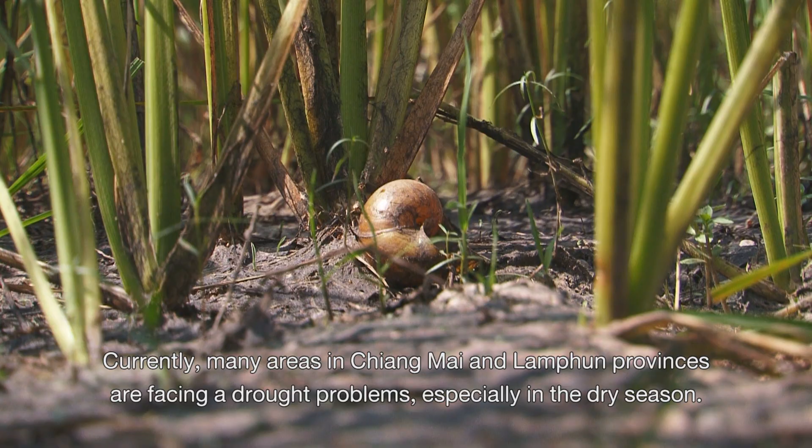Currently, many areas in Chiang Mai and Lamphun provinces are facing drought problems, especially in the dry season. The problem is due to urban development and increasing population, which leads to higher demand for water use.

The Royal Irrigation Department (RID) has concretely developed water resources projects in the Ping River Basin for decades. So far, there have been 3 successful irrigation projects in the Ping River. They are Mae Taeng Weir, Mae Ngat Sombunchon Reservoir, and Mae Kuang Udom Thara Reservoir projects, all of which supply water to irrigated areas of more than 500,000 rai, or 80,000 hectares, in Chiang Mai and Lamphun provinces.

While the average annual runoff of the Mae Taeng River is 622 million cubic meters, that of Mae Ngat Sombunchon Dam is 332 million cubic meters. Despite the great capacity of Mae Kuang Udom Thara Reservoir, water stored in the dam is so little that it is not sufficient for the consumption demand. Even in the rainy season, water has never reached the maximum capacity of the reservoir.

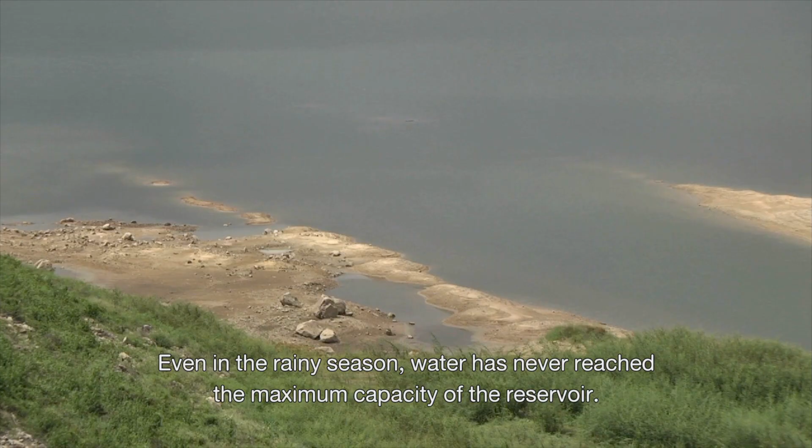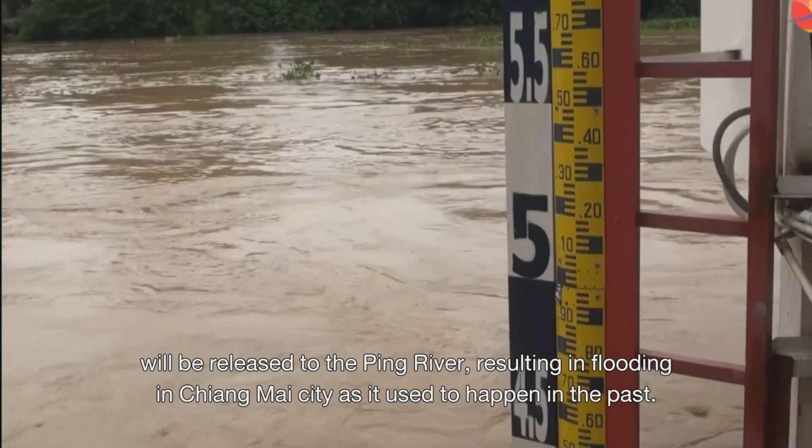So far, the water volume in the Mae Taeng River is sufficient to be irrigated to the right main irrigation canal of the Mae Taeng operation and maintenance project for the entire year. During the rainy season, July to November, a large quantity of water in the Mae Taeng River will be released to the Ping River, resulting in flooding in Chiang Mai City, as it used to happen in the past.

Each year, Mae Ngat Sombunchon Reservoir supplies sufficient water to the irrigation area, thanks to its wide catchment area, which can store more water than Mae Kuang Udom Thara Reservoir.

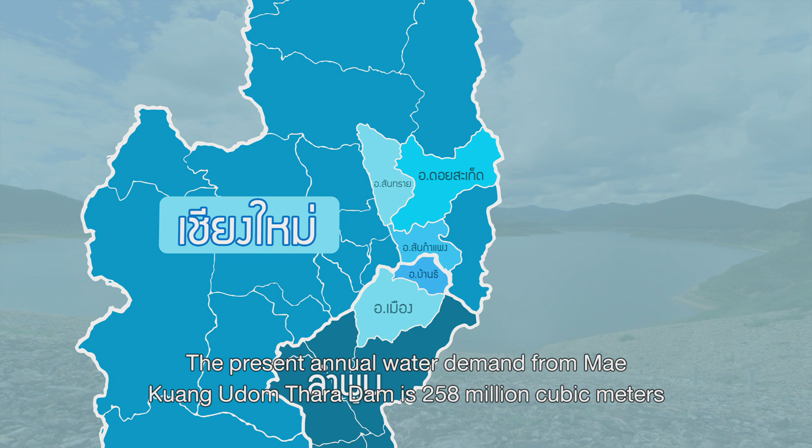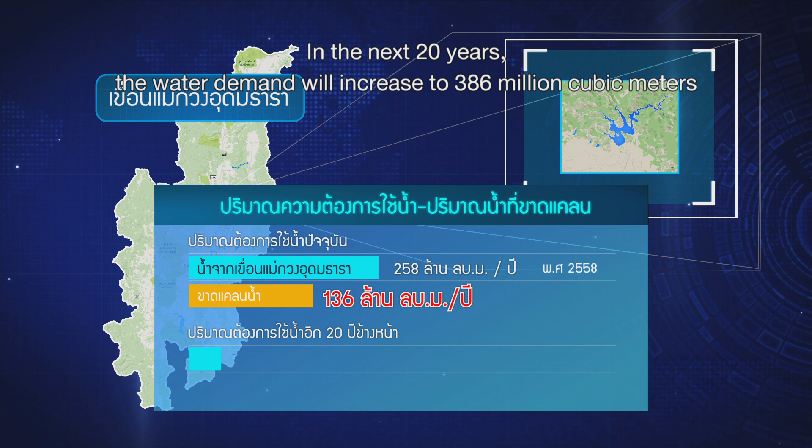According to the water demand statistics of Doi Saket, San Sai, and San Kamphaeng districts, Chiang Mai province, and Ban Thi and Mueang districts, Lamphun province, the present annual water demand from Mae Kuang Udom Thara Dam is 258 million cubic meters, while the water shortage is 136 million cubic meters. In the next 20 years, the water demand will increase to 386 million cubic meters annually, and the water shortage will be 173 million cubic meters.

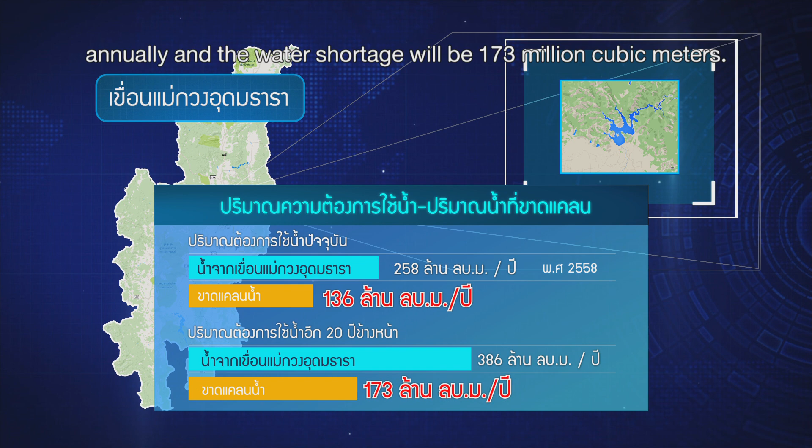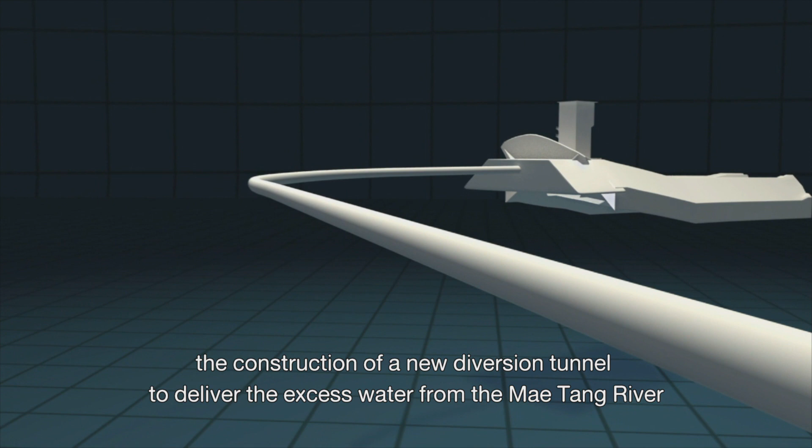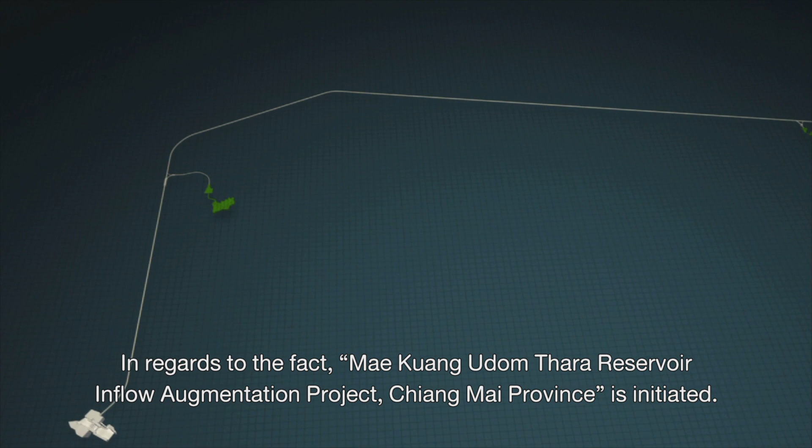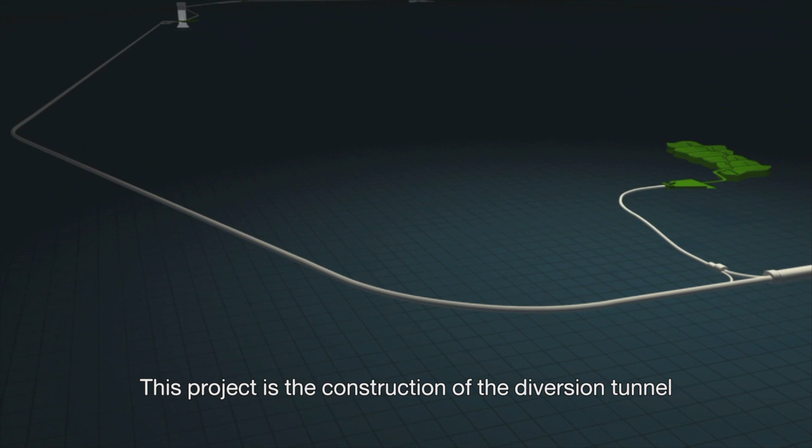Based on the cost-benefit analysis and environmental impact assessment, the construction of a new diversion tunnel to deliver the excess water from the Mae Taeng River to the Mae Kuang Udom Thara Reservoir is the best solution. In regard to this, the Mae Kuang Udom Thara Reservoir inflow augmentation project, Chiang Mai province, is initiated. This project is the construction of the diversion tunnel, with a total distance of approximately 49 kilometers.

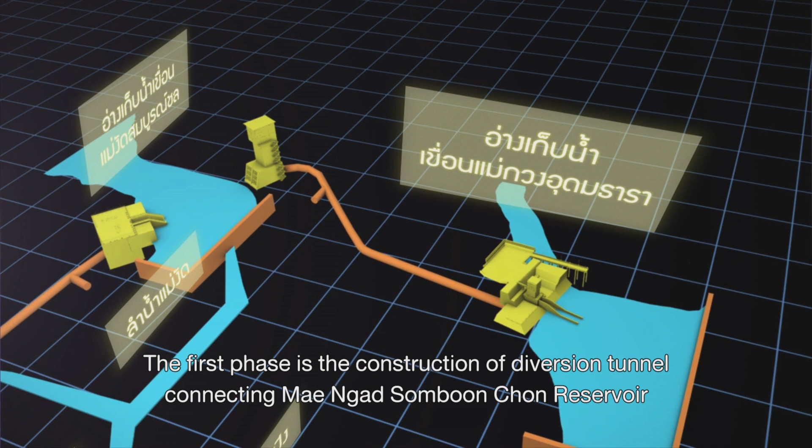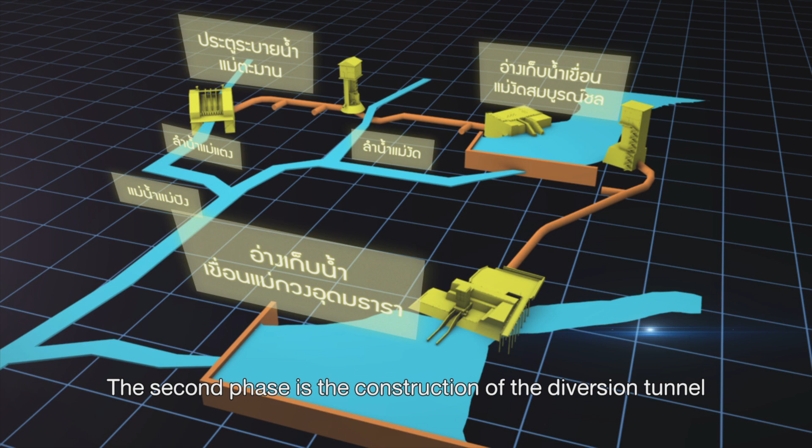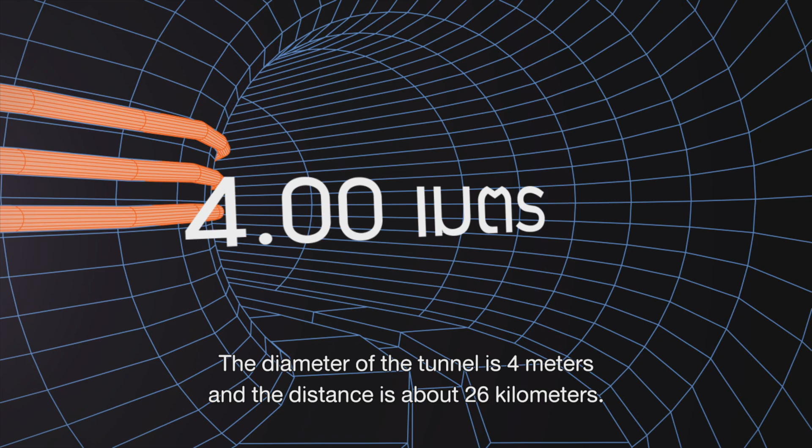The project is divided into 2 phases. The first phase is the construction of the diversion tunnel connecting Mae Ngat Sombunchon Reservoir and Mae Kuang Udom Thara Reservoir. The diameter of the tunnel is 4.2 meters, and the distance is about 23 kilometers. The second phase is the construction of the diversion tunnel connecting the Mae Taeng River and Mae Ngat Sombunchon Reservoir. The diameter of the tunnel is 4 meters, and the distance is about 26 kilometers. The 2 phases comprise disposal areas for excavated materials from the tunnel and appurtenant structures.

The Office of Construction Project for Large-Scale Irrigation 1, the Bureau of Large-Scale Water Resources Development, RID, the Ministry of Agriculture and Cooperatives are responsible for providing the constructors to carry out the construction of the Mae Taeng–Mae Ngat Diversion Tunnel, which is divided into two construction contracts according to procurement. In this section of the contract, Siam Pan Wattana Public Company Limited is responsible for completing the construction within 1,800 days with a budget of 2,134 million baht.

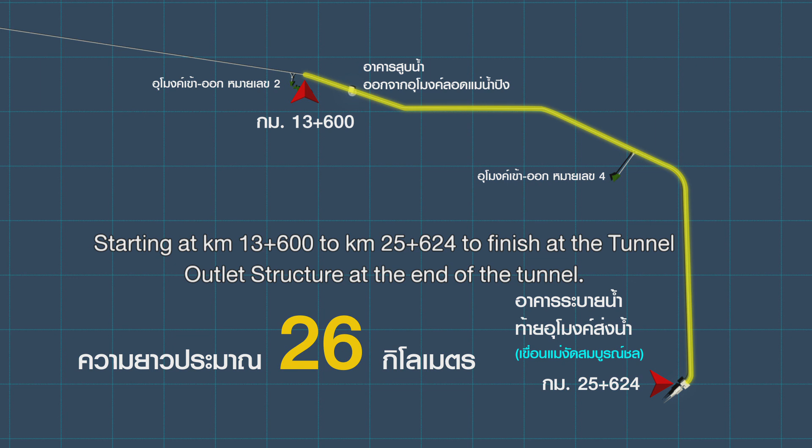The Mae Taeng–Mae Ngat Diversion Tunnel has a total length of about 26 kilometers in the responsibility of the contract, starting at kilometer 13+600 to kilometer 25+624, to finish at the tunnel outlet structure at the end of the tunnel, located at the edge of the Mae Ngat Sombunchon Reservoir, which will proceed with all 10 construction activities.

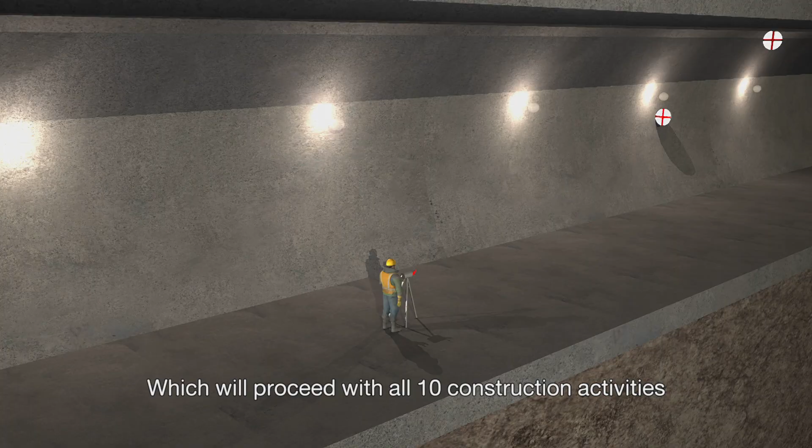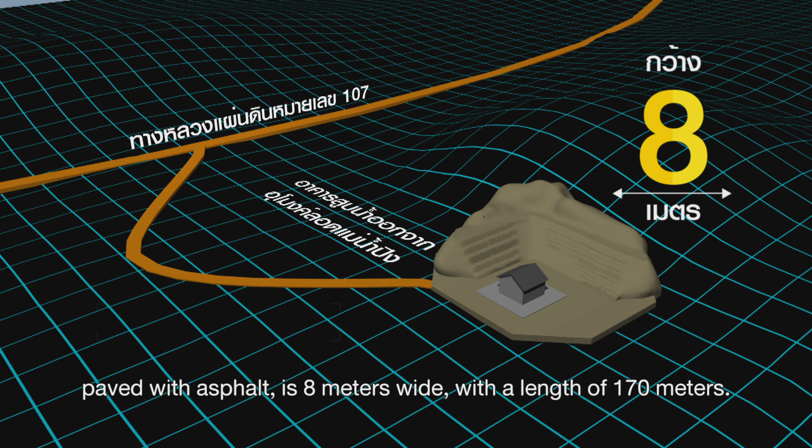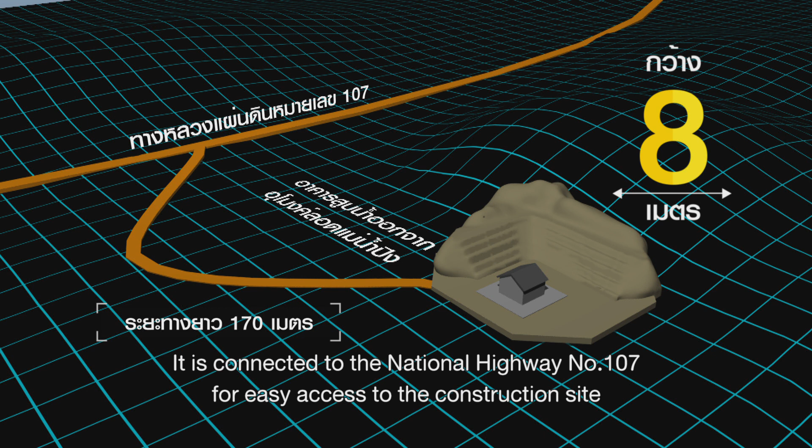Activity 1. Construction of access roads. In this part, 4 roads are constructed. 1. Road maintenance work for the pumping structure of the Ping River Siphon Tunnel, paved with asphalt. It's 8 meters wide with a length of 170 meters. It is connected to National Highway number 107 for easy access to the construction site for pumping water out of the Ping River Tunnel.

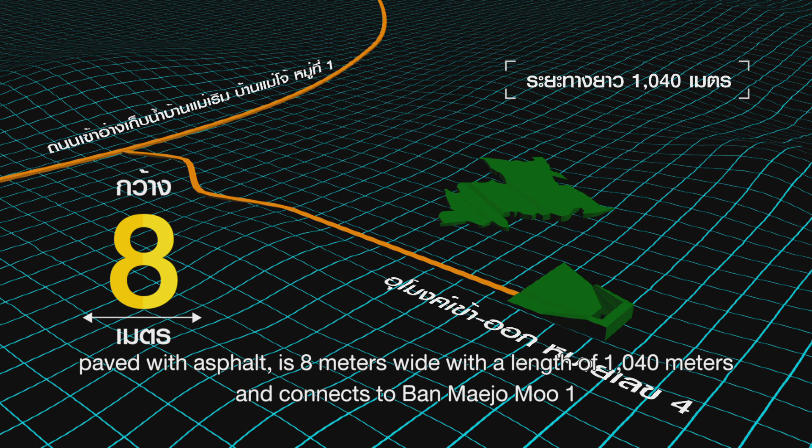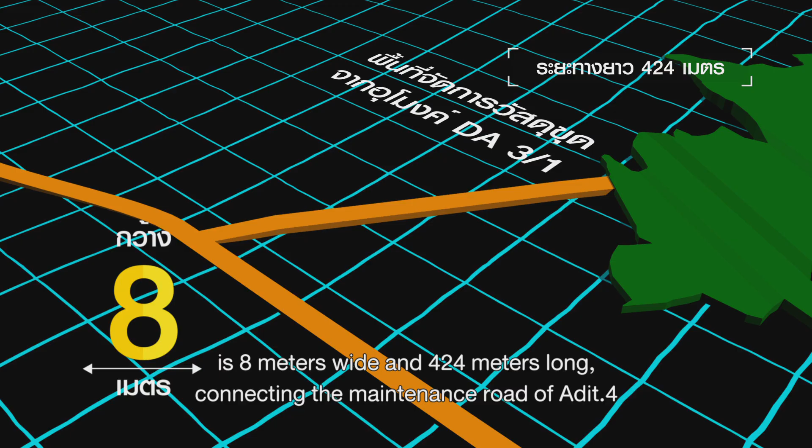2. The maintenance road of adit number 4, paved with asphalt. It's 8 meters wide with a length of 1,040 meters and connects to Ban Maejo Moo 1. 3. The maintenance road of disposal area number DA3/1. It's 8 meters wide and 424 meters long. Connecting to the maintenance road of adit 4, it is used to convey disposal materials from the tunnel to the DA3/1 site.

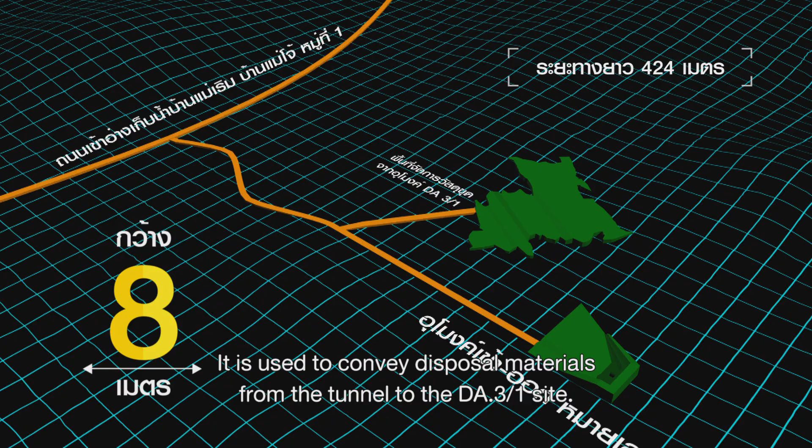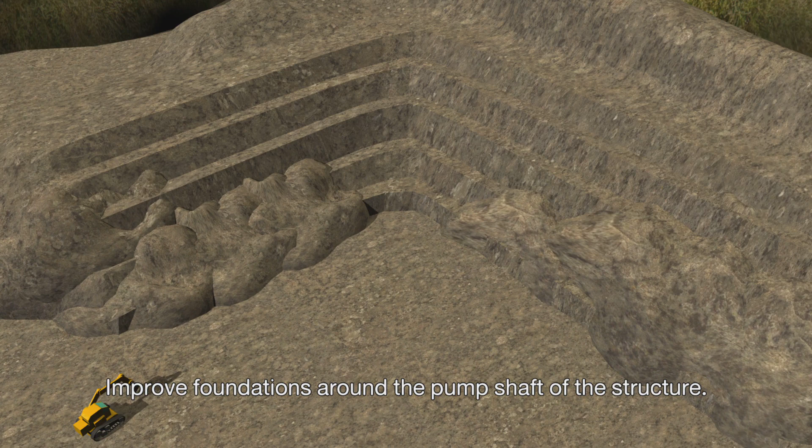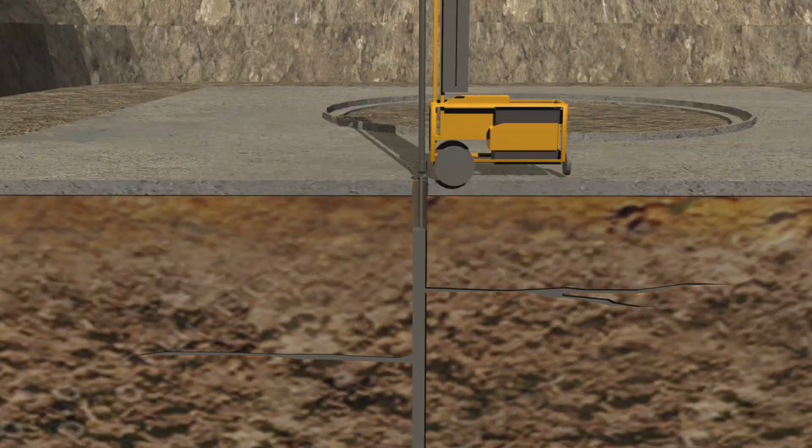Activity 2. Construction of the pumping structure of the Ping River Siphon Tunnel. Start to clear the construction area. Slope protection construction. Improve foundations around the pump shaft of the structures. Drill the shaft of the pumping structure using the vertical drill and blast method.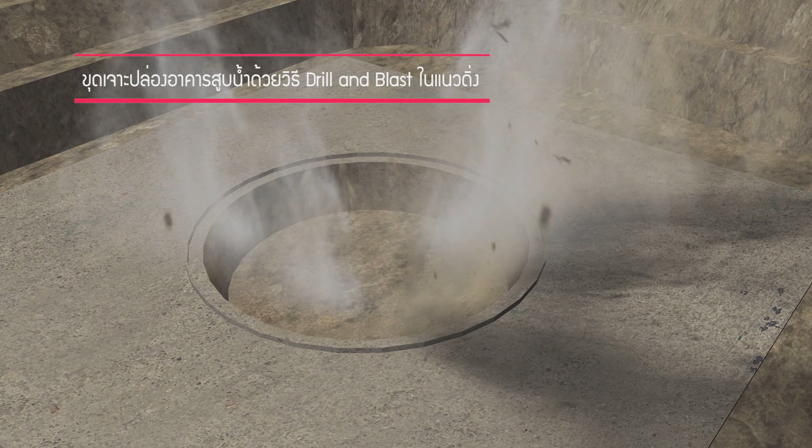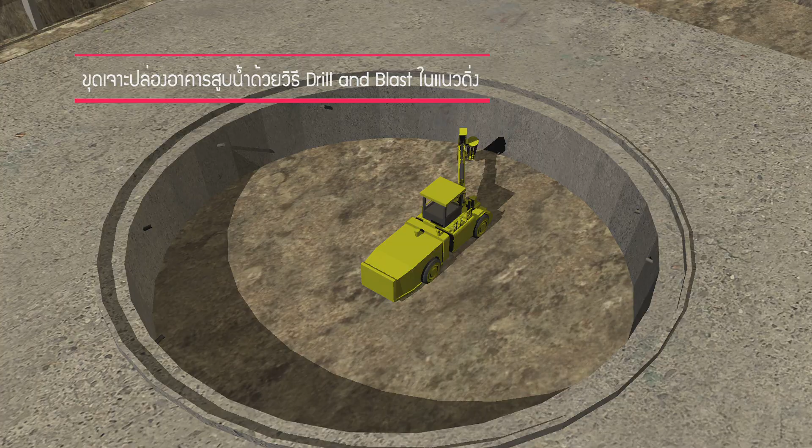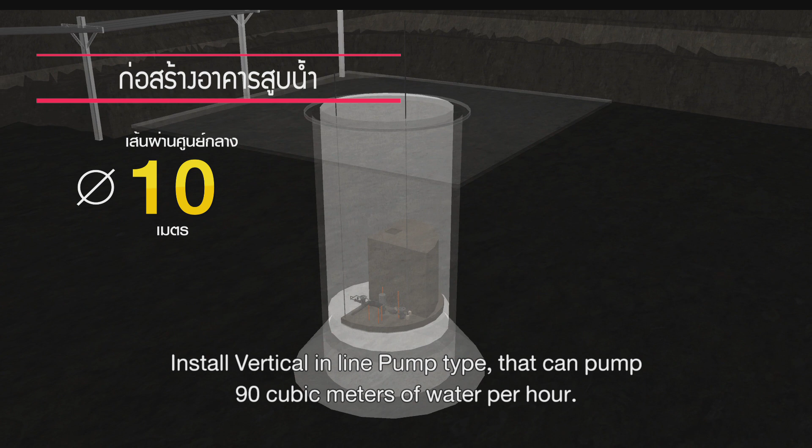And constructing a pumping structure with securely reinforced concrete with a diameter of 10 meters. Install a vertical inline pump type that can pump 90 cubic meters of water per hour. The pumping structure of the Ping River Siphon Tunnel is used for pumping the water from the Ping River Tunnel to go down to perform the maintenance of the Ping River Tunnel.

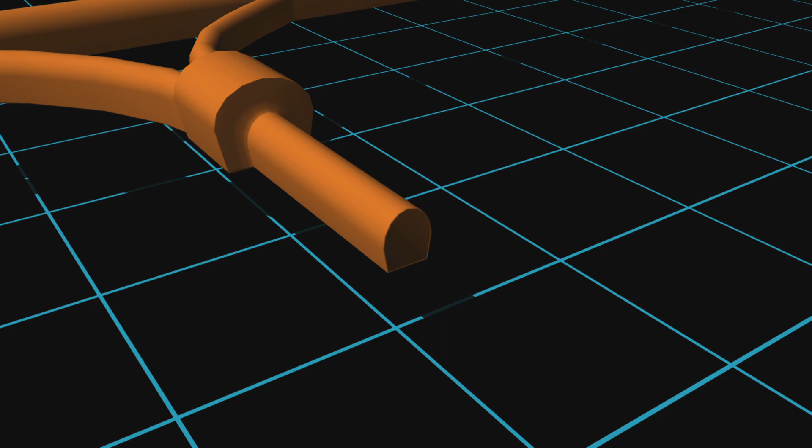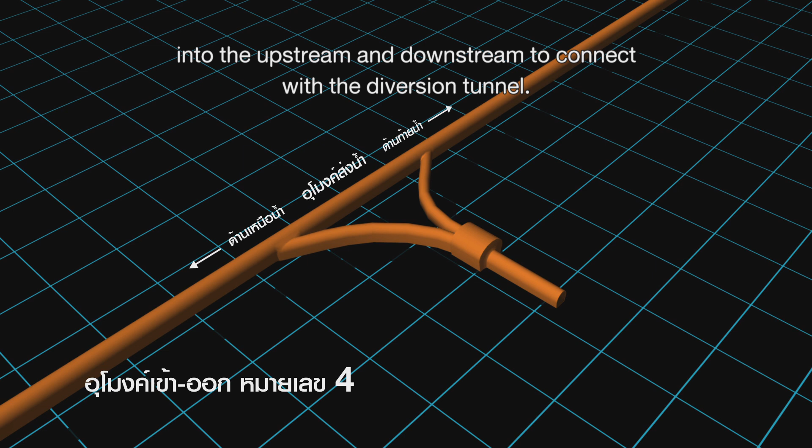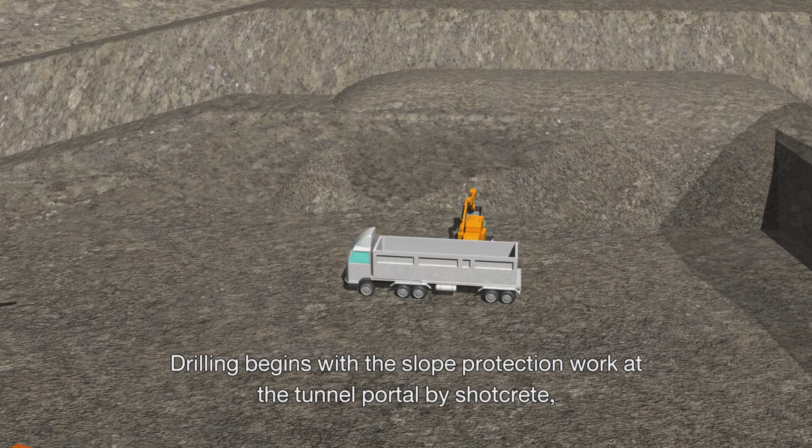Activity 3. Construction of adit number 4, AD4. Adit AD4 is 577.763 meters long with a diameter of 6 meters. The end of the tunnel is separated into upstream and downstream to connect with the diversion tunnel. Drilling begins with the slope protection work at the tunnel portal by shotcrete, installing soil bolts and rock bolts, and strengthening the tunnel portal with forepoling work and a steel arch.

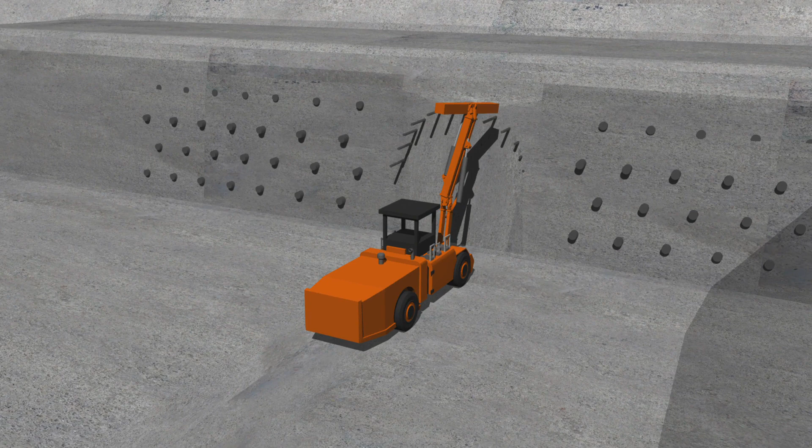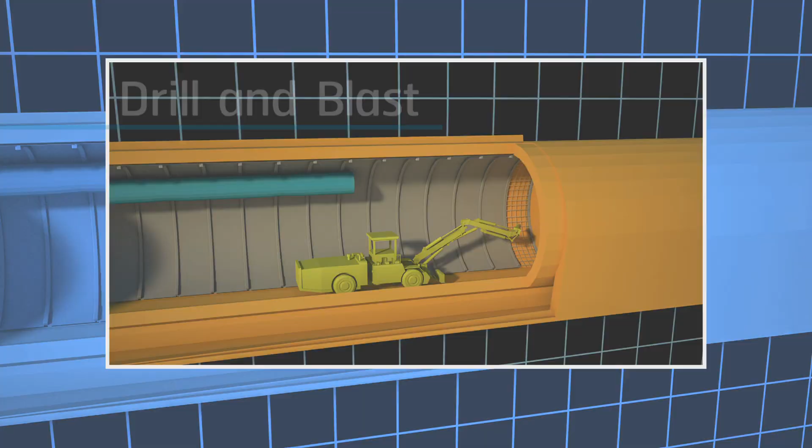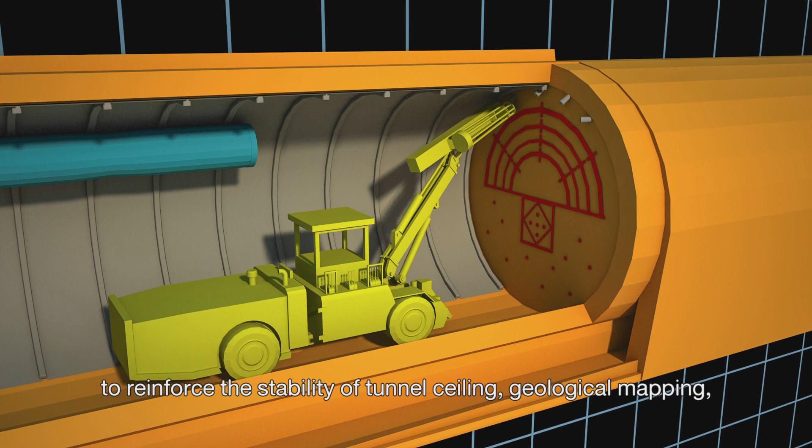The drill and blast method is used for excavation of AD4. It starts with a geological survey, followed by drilling for forepoling and filling cement mortar to reinforce the stability of tunnel ceiling, geological mapping and marking, drilling. Holes are filled with emulsion explosive prior to the blasting. At this step, the tunnel contains dust and gas caused by the explosion. So, ventilation is needed after that.

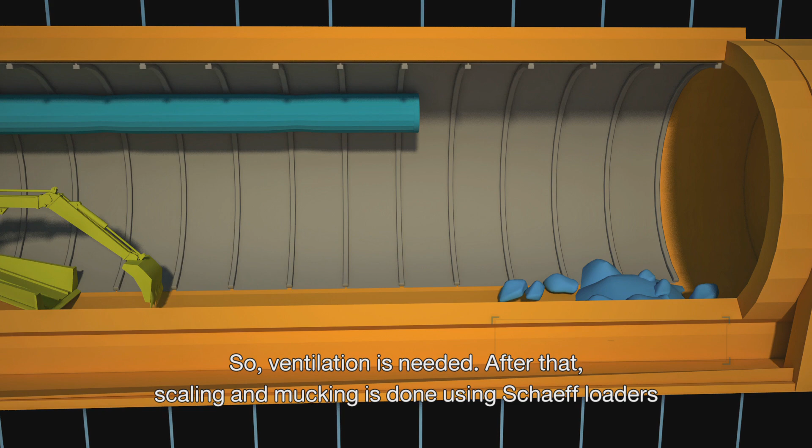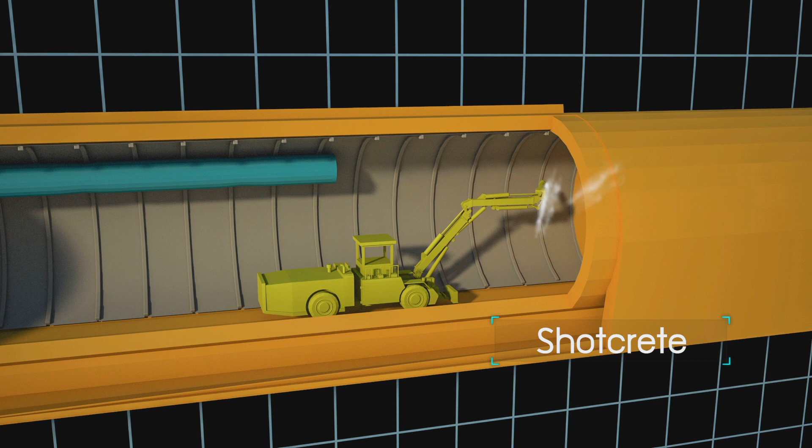Scaling and mucking is done using Schaeff loaders. and material are conveyed by trucks. Finally, strengthened by setting a steel arch, installing wire mesh and shotcrete. Install rock bolt according to the form specified in accordance with the rock mass type. The adits are constructed to hold muck out of tunnel because there are a lot of loose rock during the drilling process. It is necessary to remove it from the tunnel, transport it for disposal.

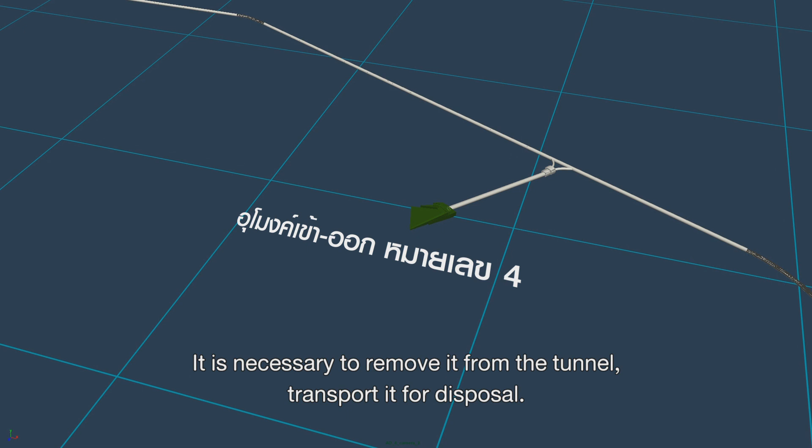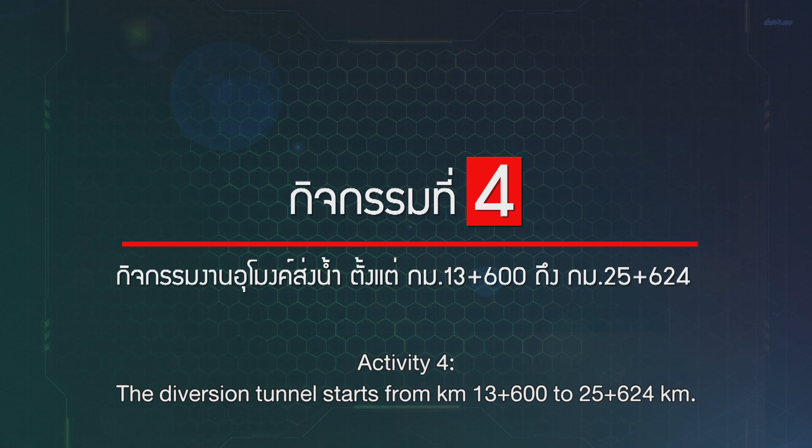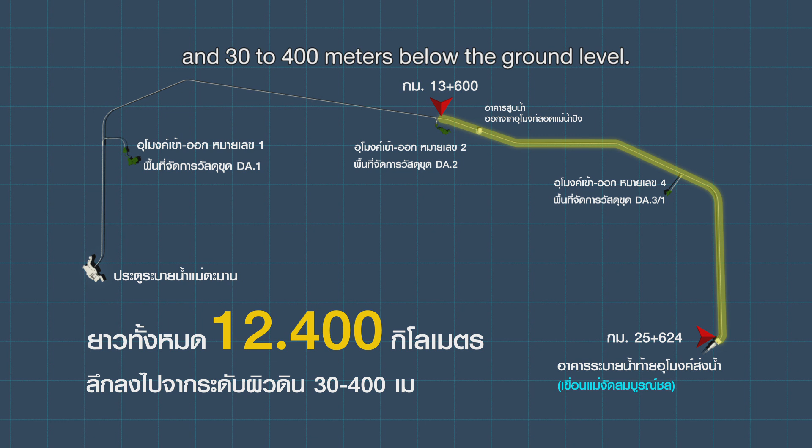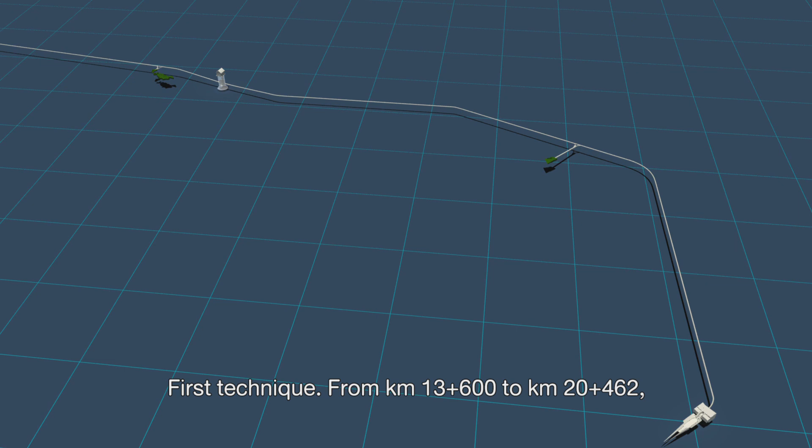Activity 4. The diversion tunnel starts from kilometers 13 plus 600 to 25 plus 624 kilometers. The diversion tunnel, as per the contract, is 12.400 kilometers long and 30 to 400 meters below the ground level. We will drill through the Adit 4 and pumping structure of Mae Ping River Siphon Tunnel. We will excavate it using two techniques. First technique from kilometers 13 plus 600 to kilometers 20 plus 462.

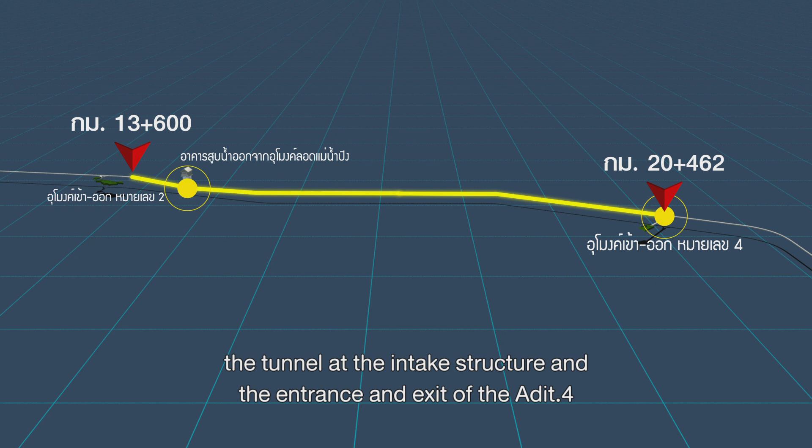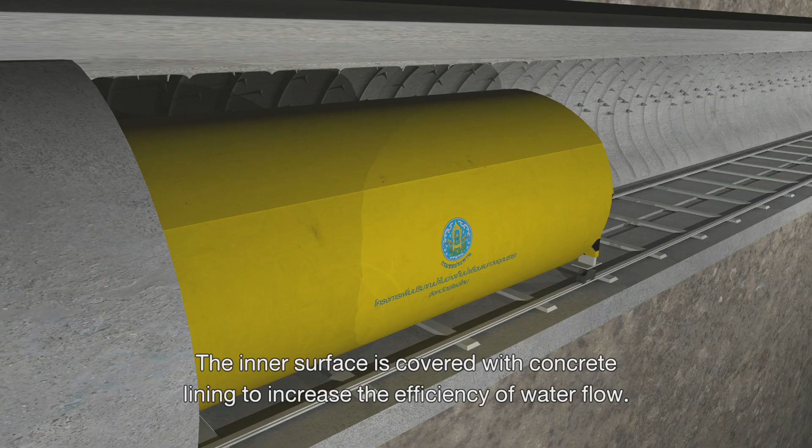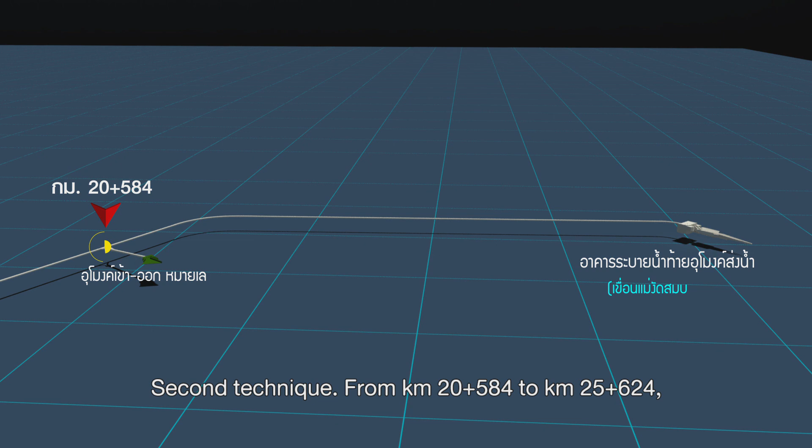The tunnel at the intake structure and the entrance and exit of the Adit 4 will be excavated using the drill and blast method. The drill and blast process starts with the same procedure of the tunnel and strand excavation. The inner surface is covered with concrete lining to increase the efficiency of water flow. Second technique from kilometers 20 plus 584 to kilometers 25 plus 624. The entrance and exit of the tunnel Adit 4 will be excavated using the second technique of the tunnel boring machine

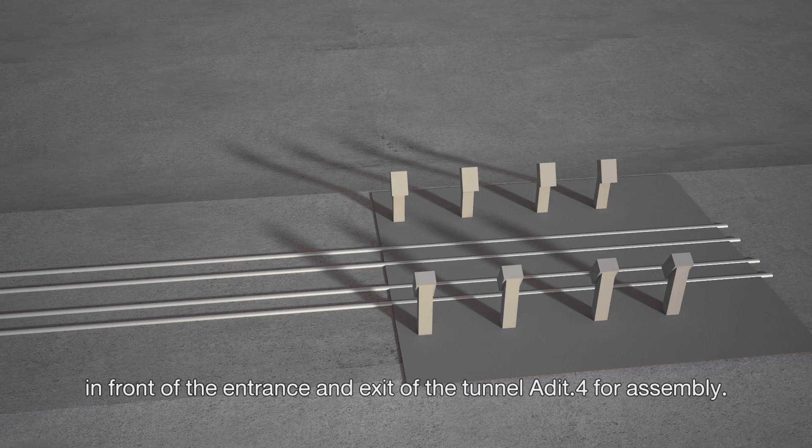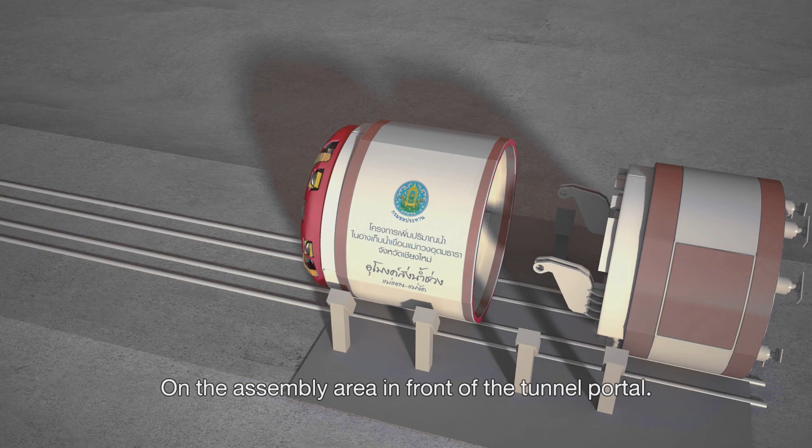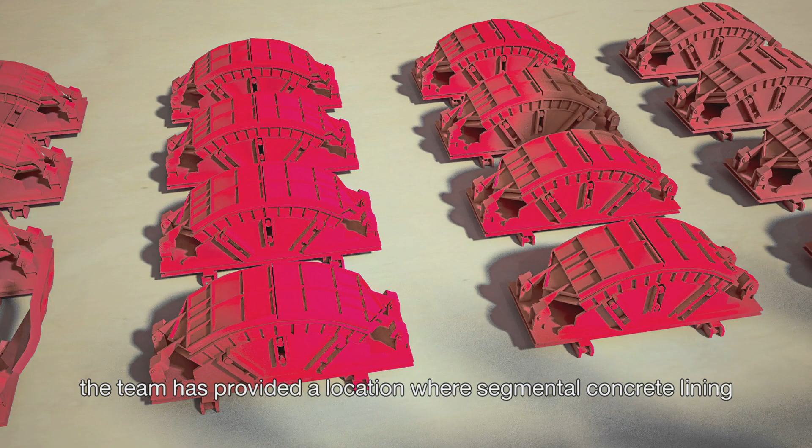TBM method. After that, staff will remove cutting head wheels and all components of the TBM to the construction site in front of the entrance and exit of the tunnel Adit.4 for assembly. It is divided into two parts, TBM front shield and TBM tail shield on the assembly area in front of tunnel portal. On the other side of the area called segmental concrete lining factory, the team has provided a location where segmental concrete lining is produced to meet the standard of normal and heavy type geological data.

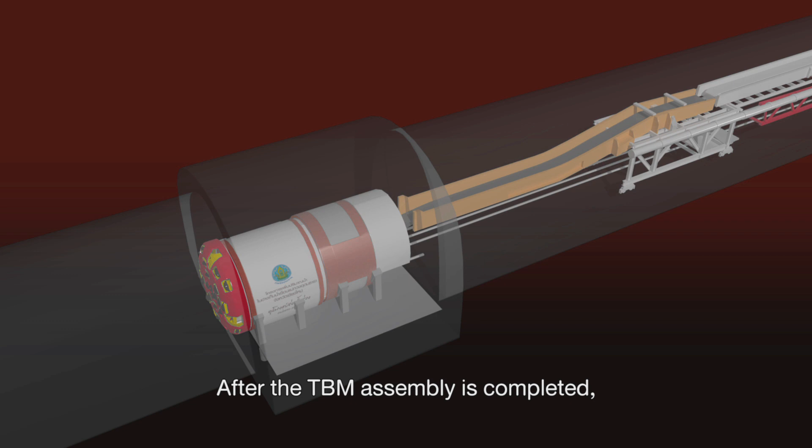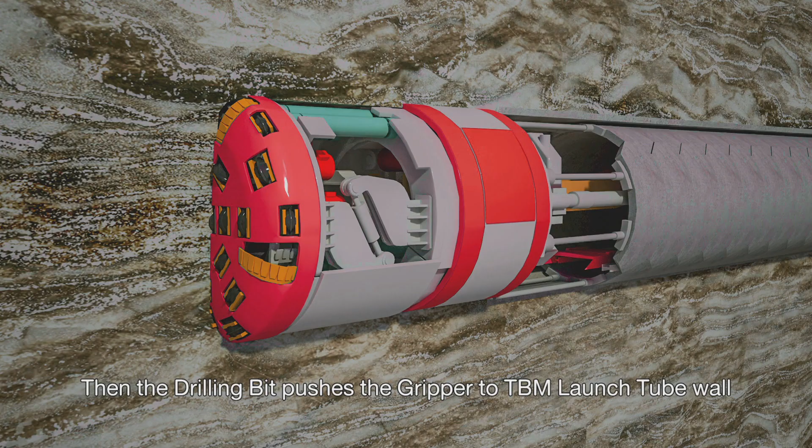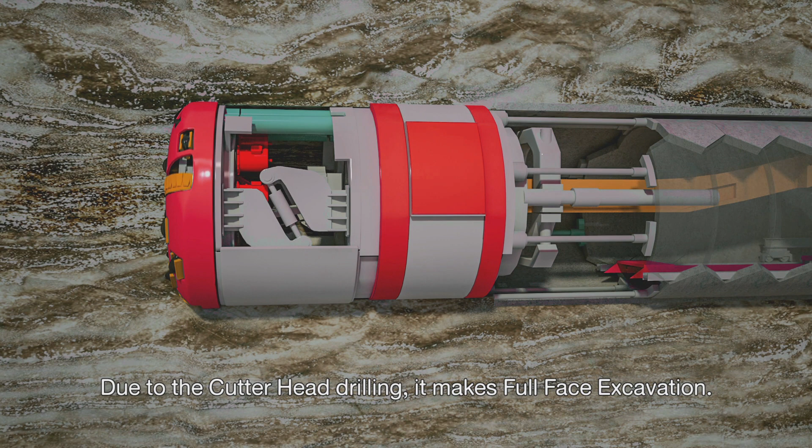After the TBM assembly is completed, the first inward segmental concrete lining and others until reaching TBM launch tube will be installed by the erector as part of a backup component so that the drilling bit is positioned to start the excavation. Then the drilling bit pushes the gripper to TBM launch tube wall that is prepared at the final 14-meter section. Due to the cutter head drilling, it makes full face excavation. When the cutter head is completely screwed, it pushes main thrust cylinder.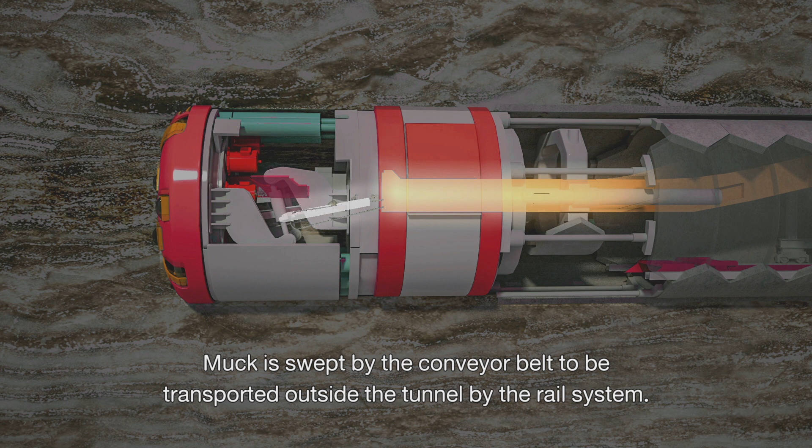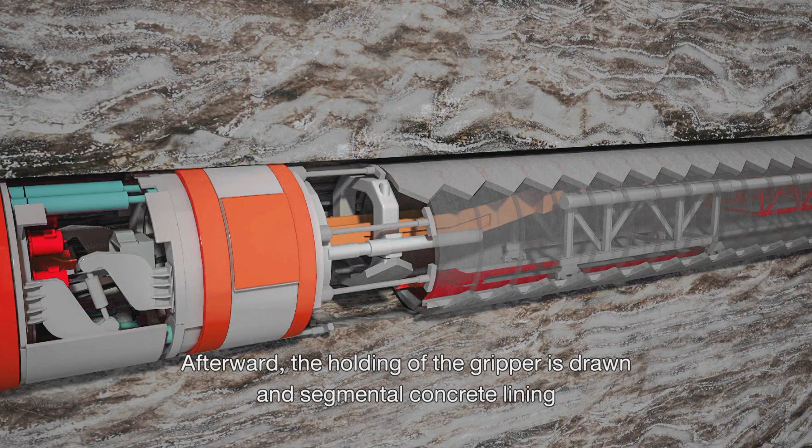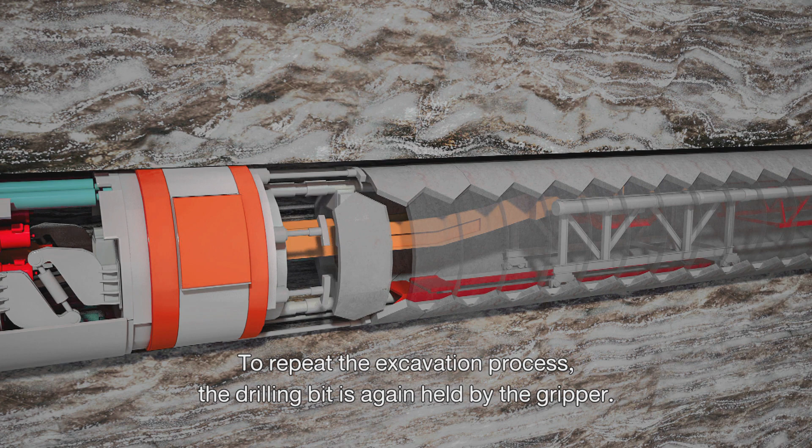The drilling bit is pushed into full face excavation and rocks are cut by a cutter head, muck makes its way by the conveyor belt, to be transported outside the tunnel by the rail system. Afterward, the holding of the gripper is drawn. A segmental concrete lining is installed to support the drilling bit to remain its level for excavation. Then, all compression forces are removed while the drilling bit is moving forward to reach the required position. To repeat the excavation process, the drilling bit is again held by the gripper.

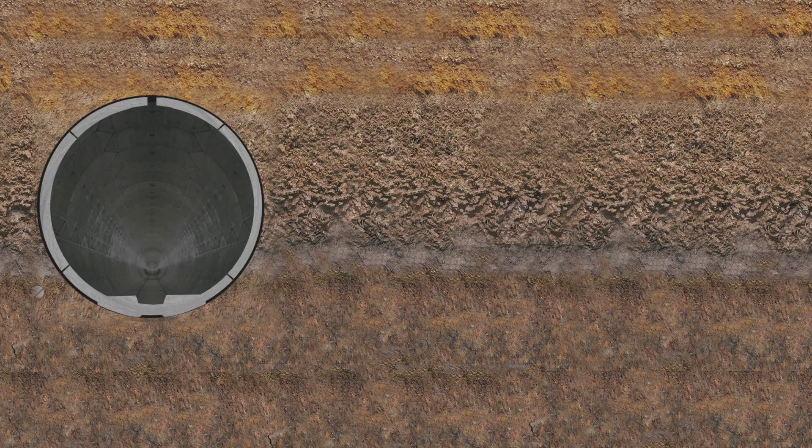As full backup components, a segmental concrete lining will be installed and transported from the outlet portal to the drilling bit. Then, segments will be arranged in the order in accordance with the installed position and type of segments. At the end of shield, after the installation of segment concrete lining, injecting cement mortar onto the tunnel's floor is obligatory. Then pea gravel is put into the gap between segment concrete and the tunnel wall. The contact grouting is applied to proceed with cement mortar. All of these steps relate in sequence and excavation process will continue like a loop.

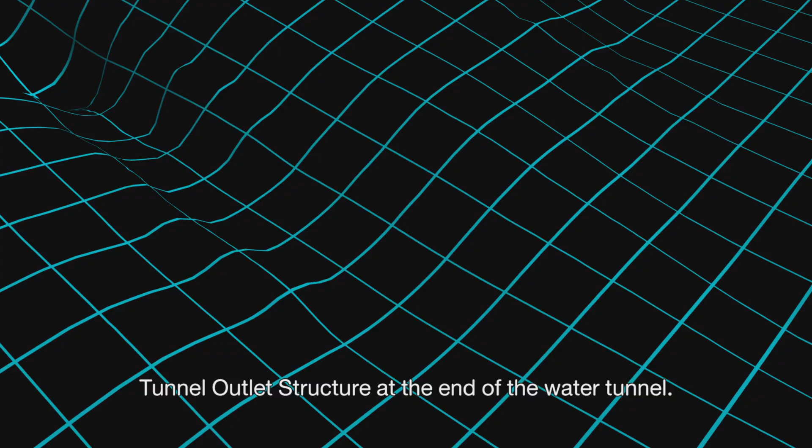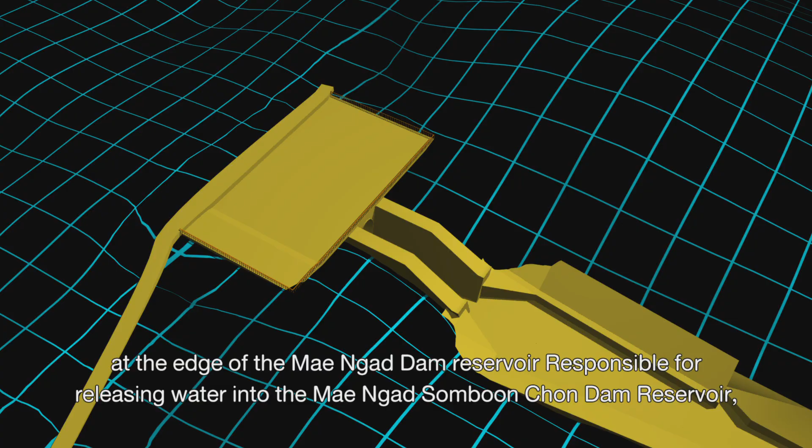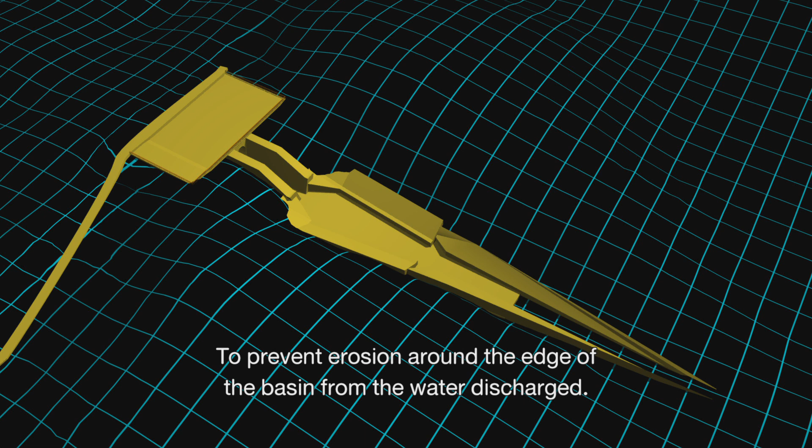Activity 5. Construction of tunnel outlet structure. Tunnel outlet structure at the end of the water tunnel will be located at the end of the water tunnel at the edge of the dam reservoir, responsible for releasing water into the dam reservoir. It's an energy dissipator structure to prevent erosion around the edge of the basin from the water discharge. The structure width is 6 meters, 10 meters long. The size of the gate is 4 meters. The maximum water rate of flow is 28.50 cubic meters per second.

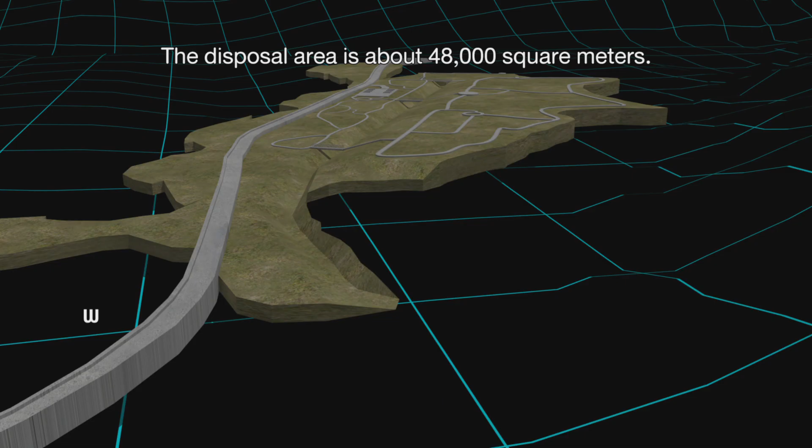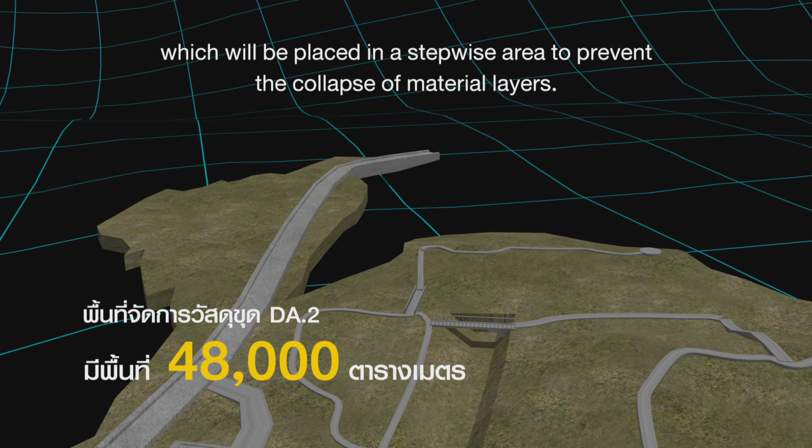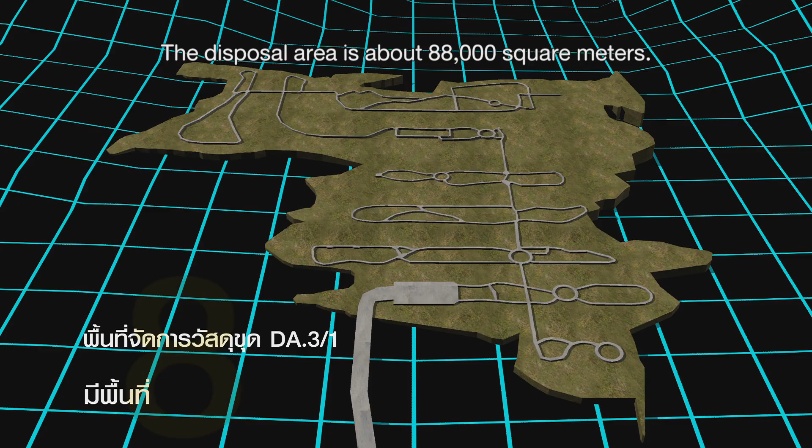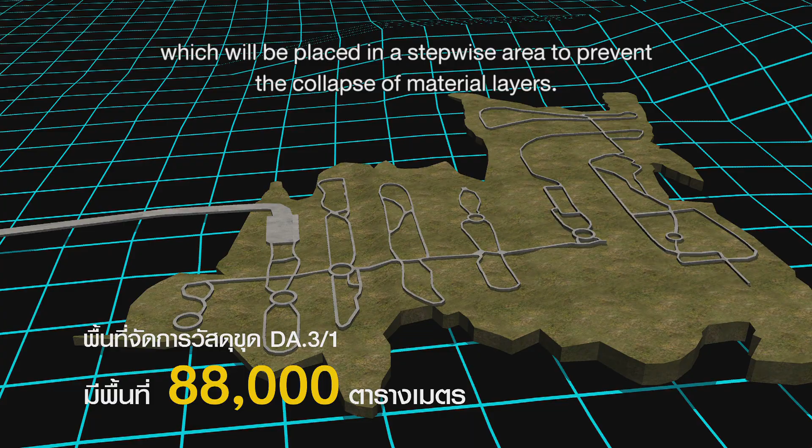Activity 6. The disposal area number 2, DA2, is constructed. The disposal area is about 48,000 square meters. We use this area to dispose of excavated materials from the tunnel, which will be placed in a stepwise area to prevent the collapse of material layers. Activity 7. The disposal area number 3/1, DA3/1, is constructed. The disposal area is about 88,000 square meters. We use these areas to dispose of excavated materials from the tunnel, which will be placed in a stepwise area to prevent the collapse of material layers.

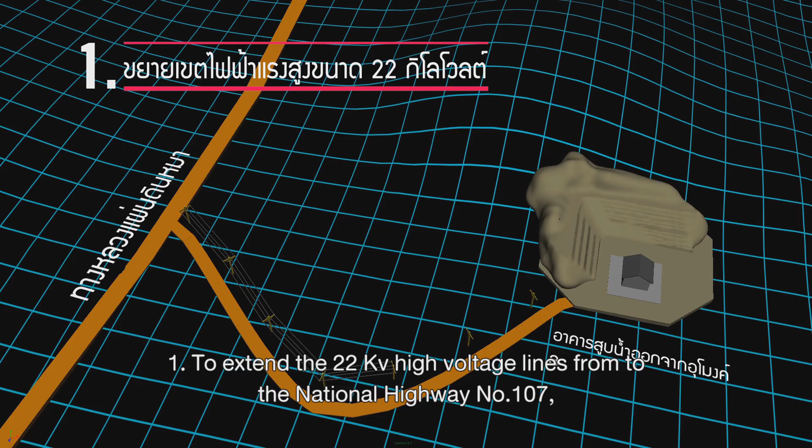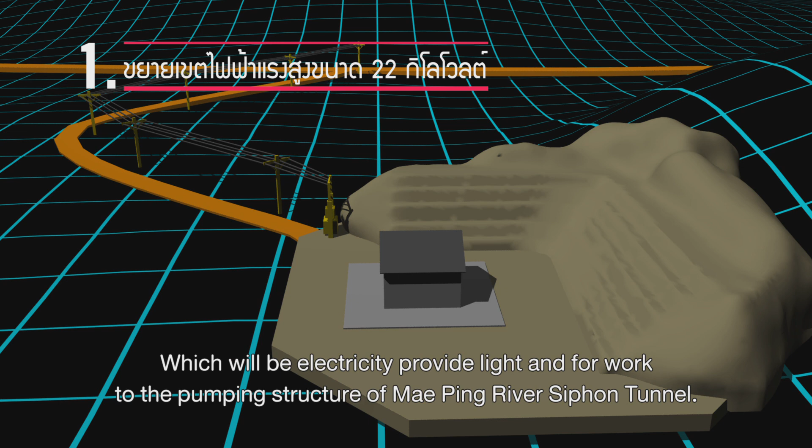Activity 8. Electricity system is constructed. The power system includes two parts. 1. To extend the 22 kV high voltage lines to the National Highway number 107 with 160 kVA transformer and main electrical system control cabinet, which will provide electricity for light and for work to the pumping structure of Mae Ping River Siphon Tunnel. 2. Expand the area of 22 kV high voltage. Utility poles and power lines are installed along the road to provide electricity for light and for construction.

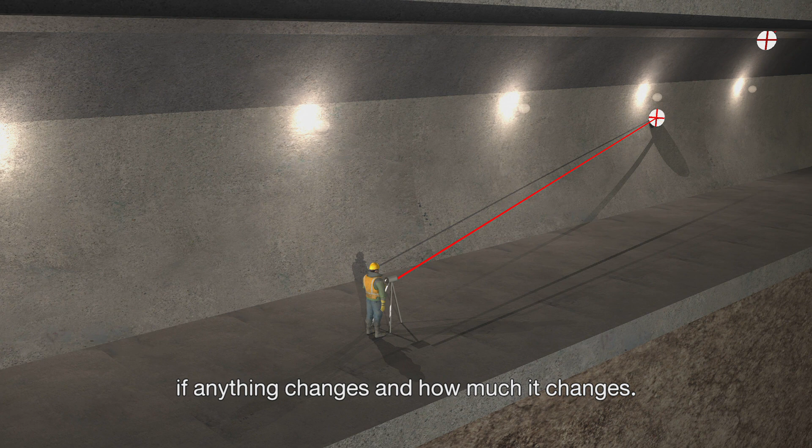Activity 9. The tunnel deformation monitoring. This activity is a survey work of the tunnel wall during the working process to check if anything changes and how much it changes. The activity includes two techniques, drill and blast and TBM. Activity 10. Dewatering during construction. All these activities will take 1,800 days.